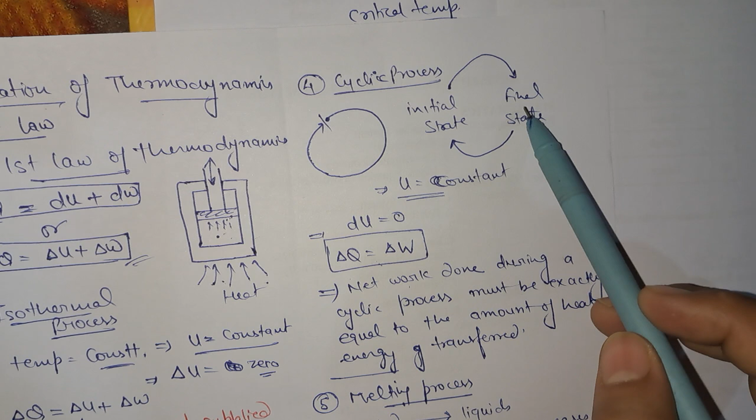Okay, so in our previous video, we have discussed about gases and vapor, and now we will discuss today about process which is cyclic process and non-cyclic process. So, what was cyclic process? Cyclic process is a system process which starts from an initial state and reaches to the final state, and the final state could be reached again to the initial state.

In this condition, the U remains constant, that is internal energy. So there is no change in internal energy, hence overall heat, whatever change in heat is done, that totally converted into work done. So there is only the change of heat energy into work done takes place.

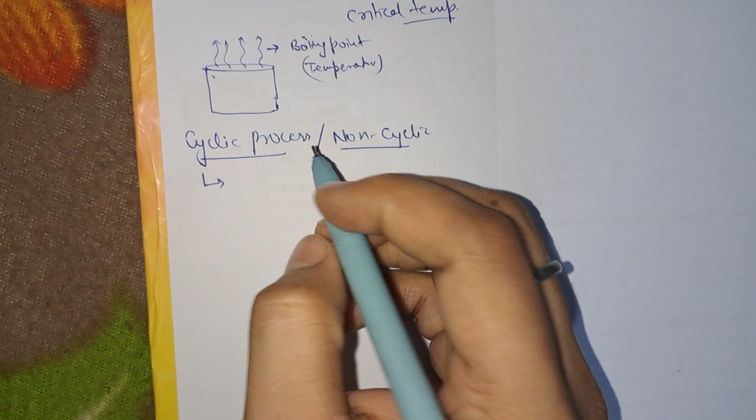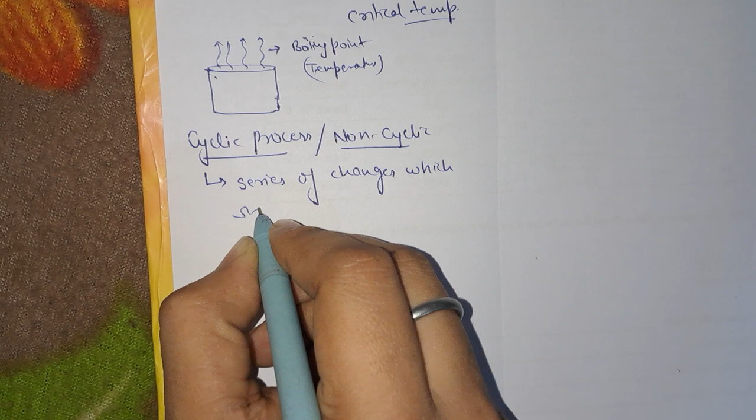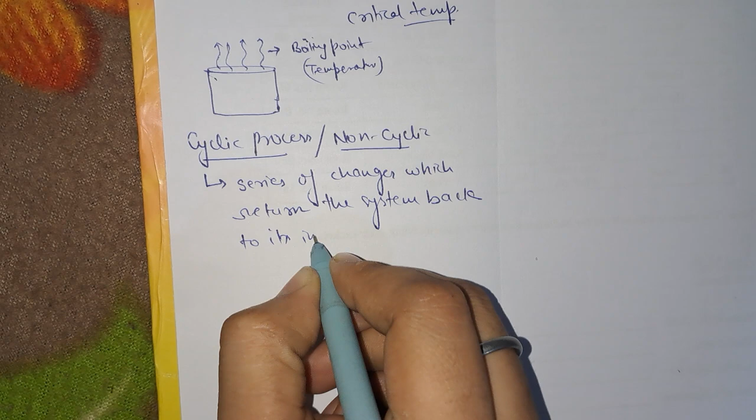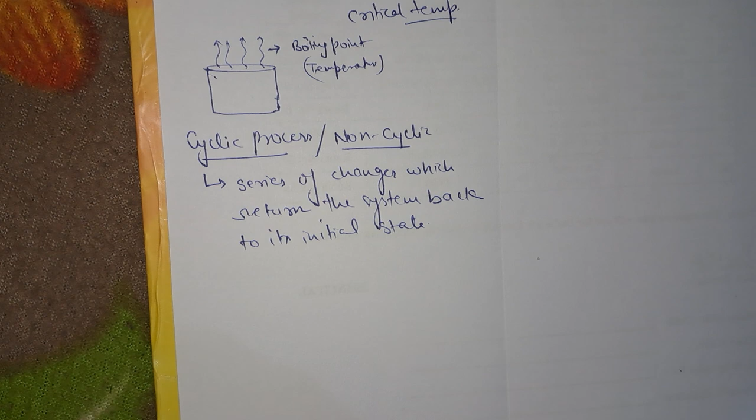So, cyclic process and non-cyclic process. So cyclic process is a process which contains a series of changes which return the system back to its initial state. Okay, it consists of various changes which return the system back to the initial state, as we have just told, whereas the non-cyclic process,

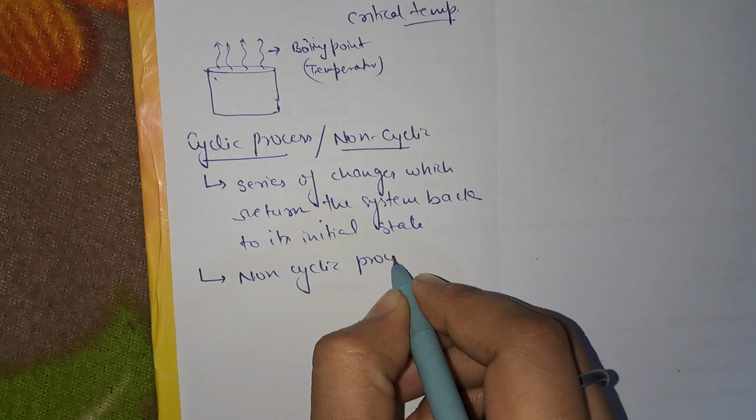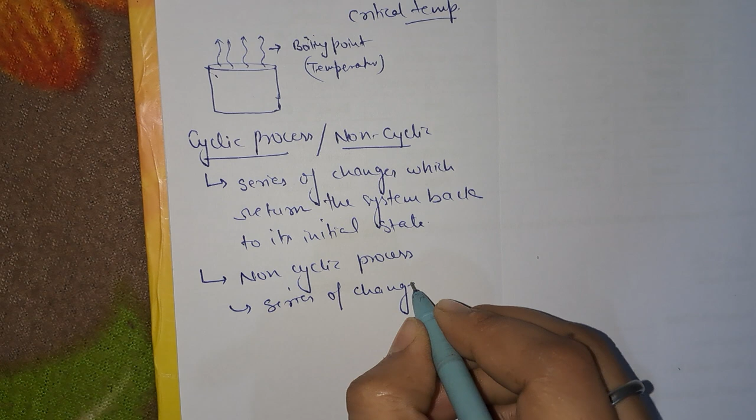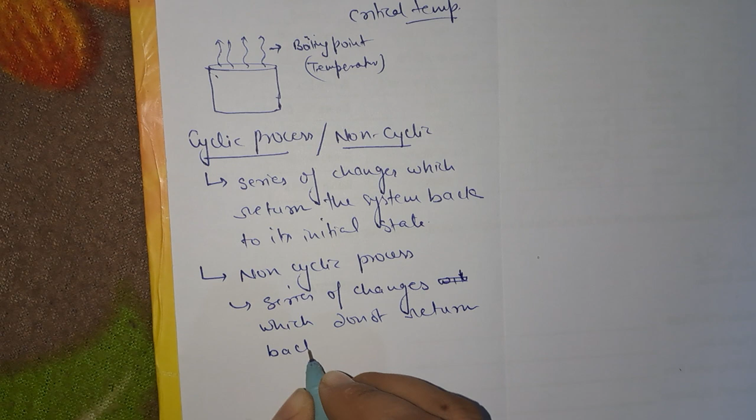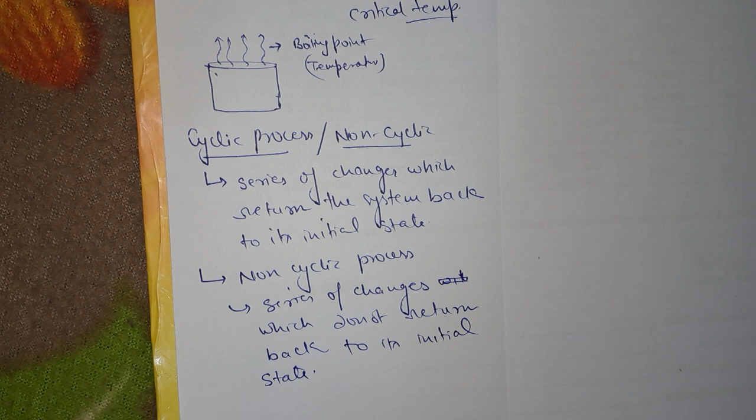what is a non-cyclic process? It is a series of changes which do not return back to its initial state. So this is all about basic cyclic and non-cyclic process.

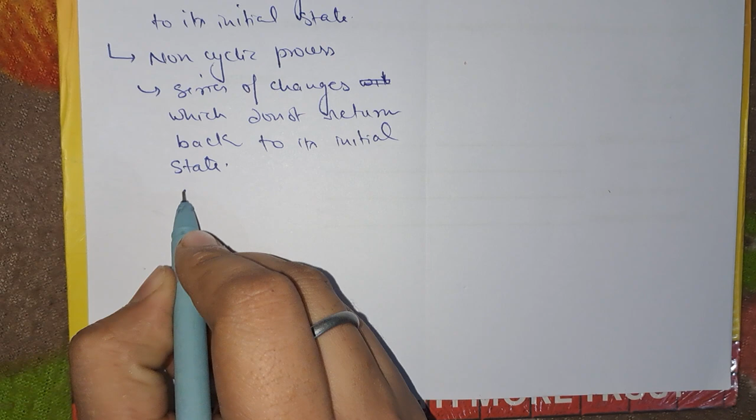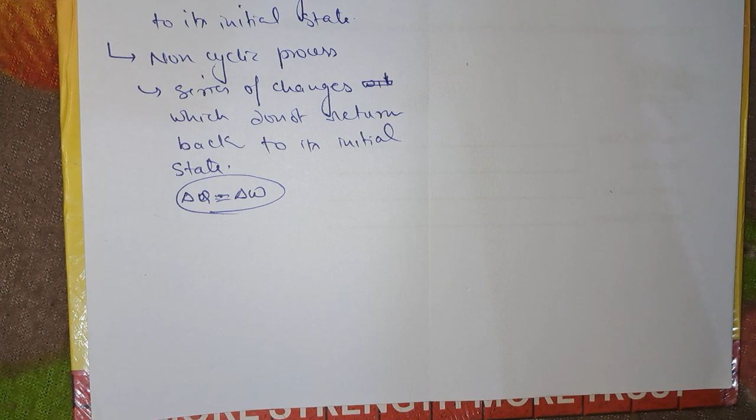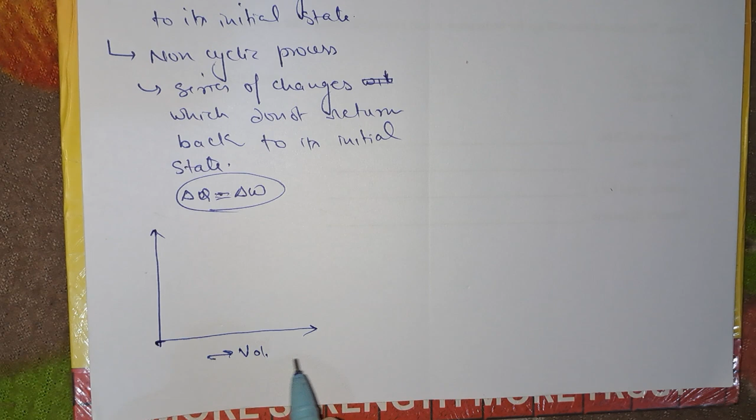What happens is, as we have discussed, that total heat energy is equals to change in work done. Whatever work done is by or on the system, that is nothing but the heat given. So let us talk about the work done in cyclic process. Let us consider this is volume and this is pressure.

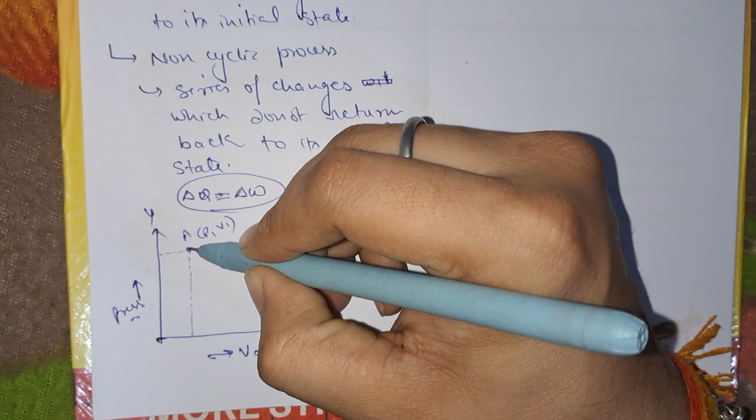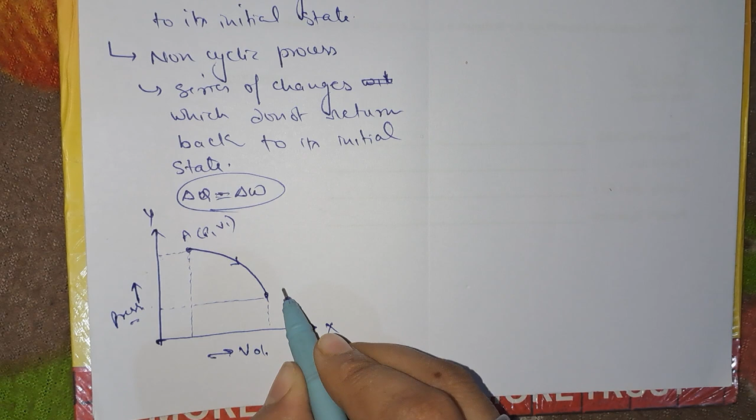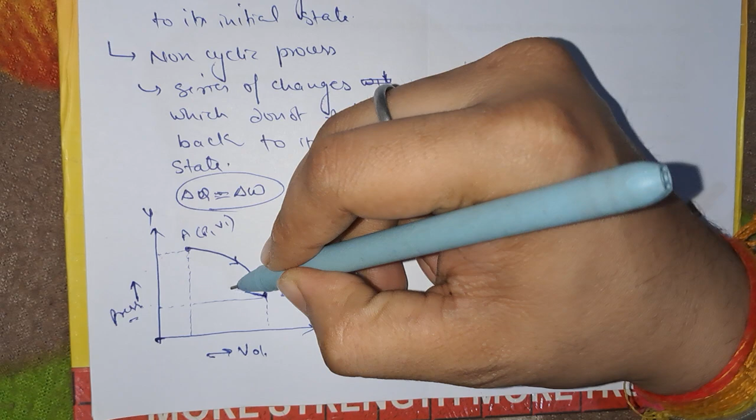So initially the system was at certain pressure and certain volume. Let pressure and volume at this point be P1 and V1, and some energy has been given, and through a process it has reached to a state, final state, let it be B, P2 and V2. So when whatever changes have been made are reversed, the system again reaches to the initial state, that is point A.

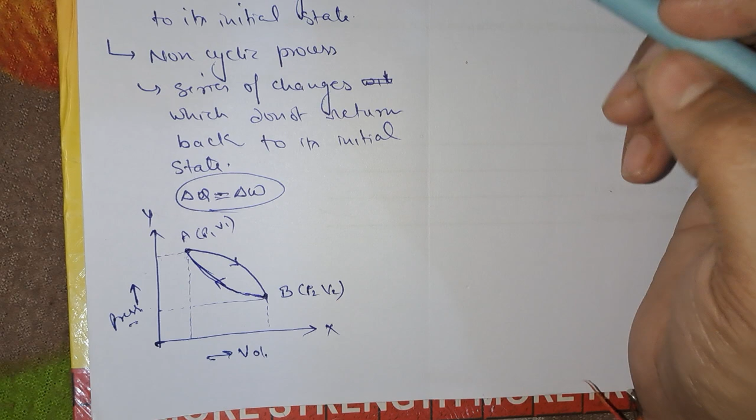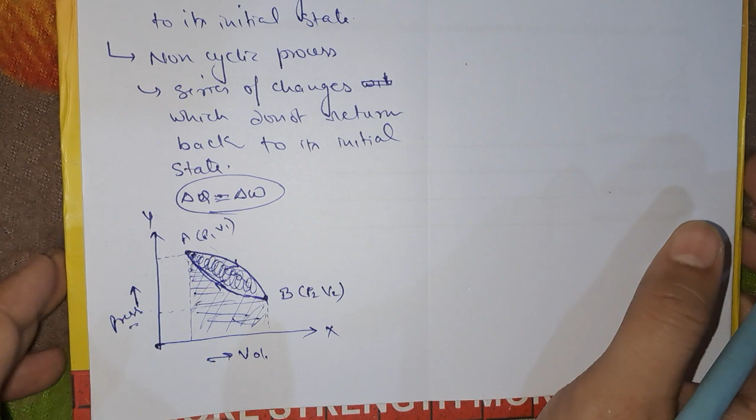So what is the work done? This complete area under this minus this. So the remaining is the work done during a cyclic process, given by the area under this curve. So let work done by forward process, let this A to B be the forward process.

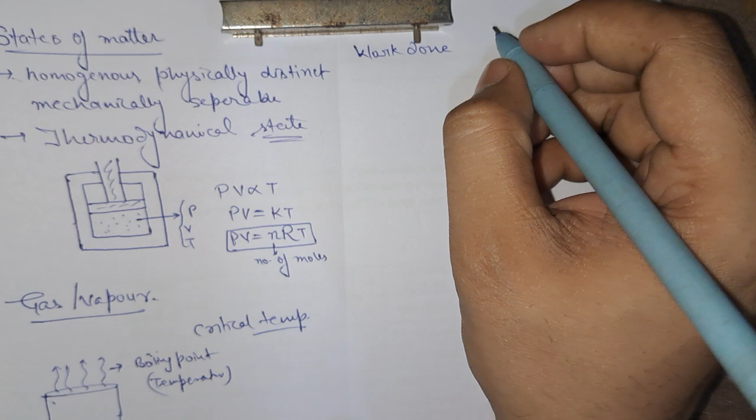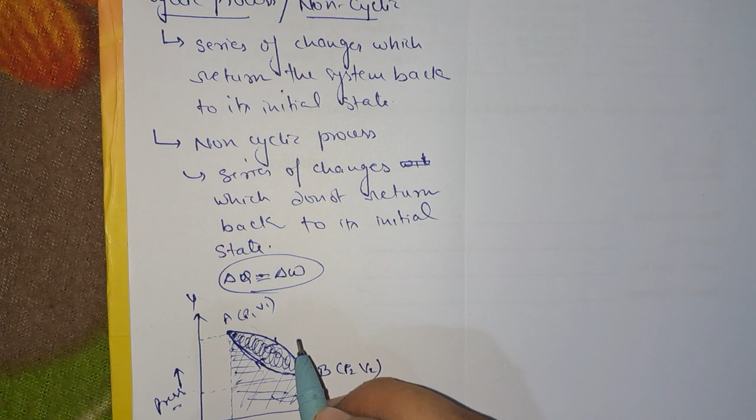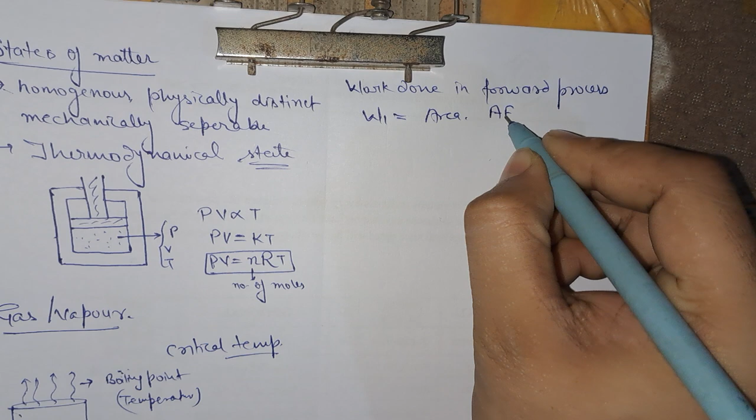So work done in forward process, let it be W1, is equals to area under A, let there be some more points also, let it be E, because A, B, C, D, E and F. So area under AEB, C, D, A.

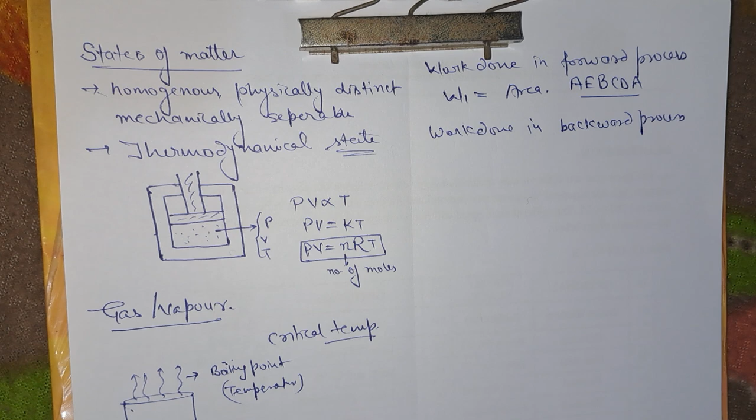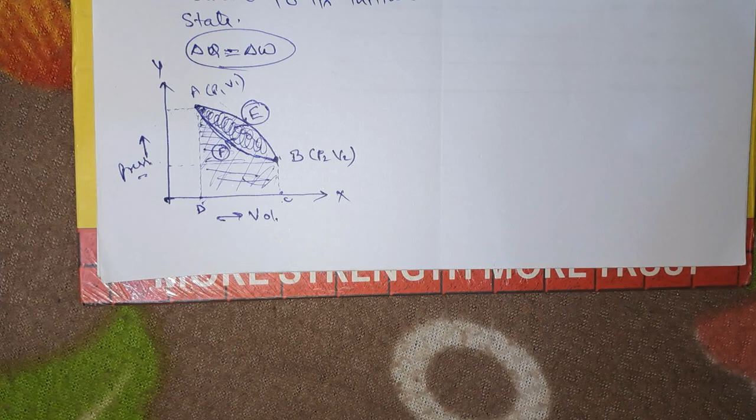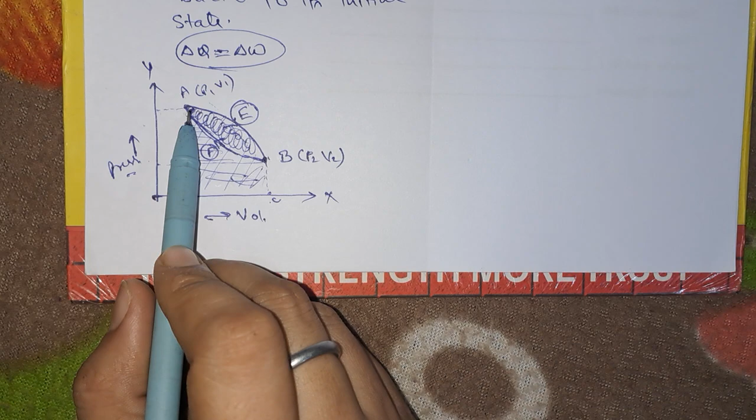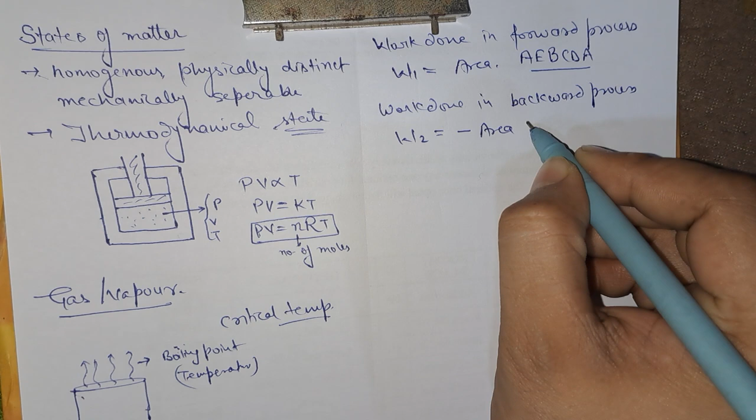And work done in backward process, that would be, and this is minus, since the process is in opposite direction, so we can put a minus sign here. So starting from this point, B, F, A, D, C, B. So W2 will be minus of area B, F, A, D, C, B.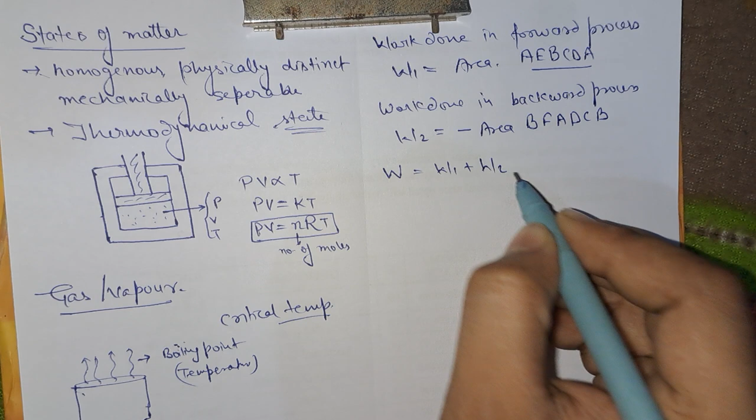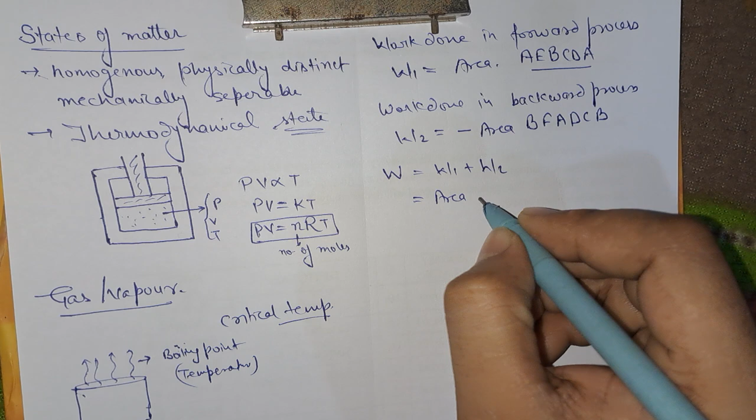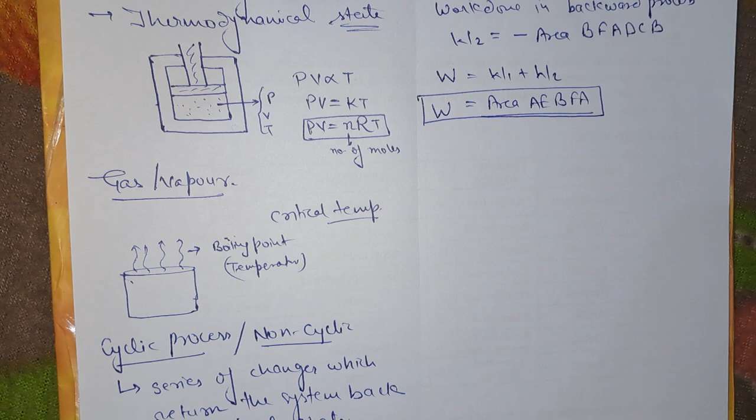So work done is equals to work done in forward process plus work done in backward process. So we get area of AEBCDA minus area BFADCB. So thus we get here AEBFA. So this is the total work done in the cyclic process. And in this case it is in anti-clockwise direction.

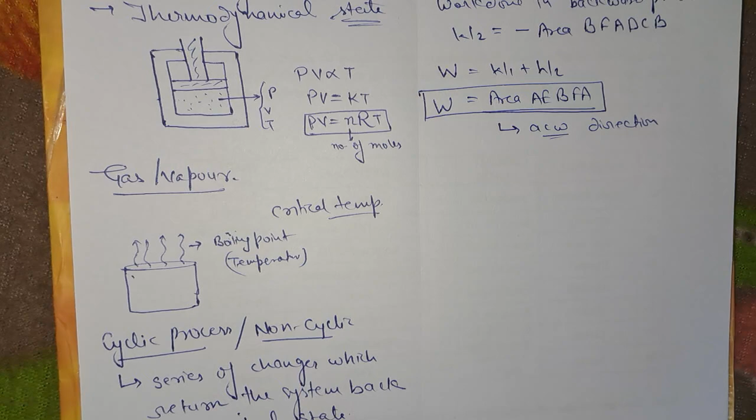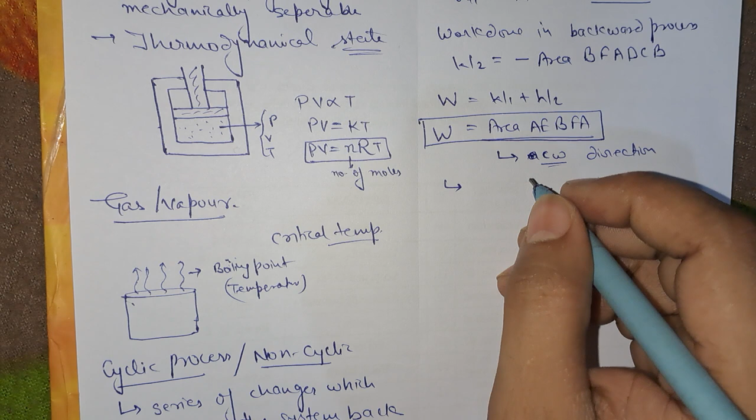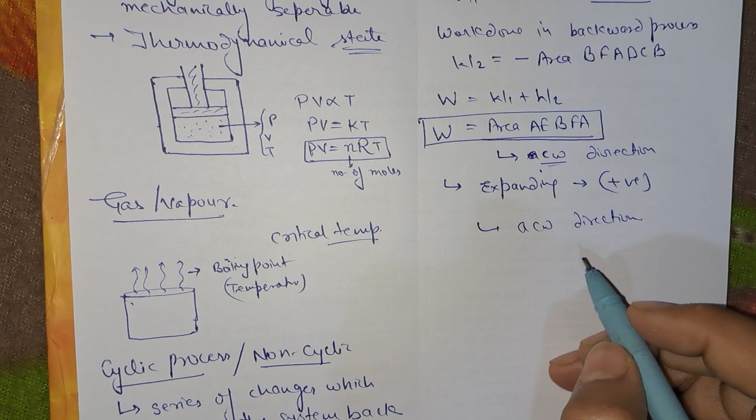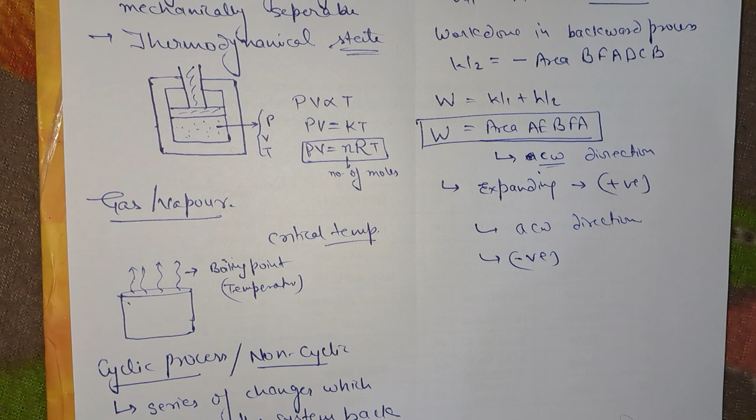So in this case it is forming a clockwise direction, it is not anti-clockwise basically. So in this, the clockwise direction is being observed, means the overall system is expanding, and in this it will be positive. And if it is observed to be anti-clockwise direction, then in this case the overall area comes to be negative. So in this case the work done is by the system, and in this case the work is done on the system. Okay.

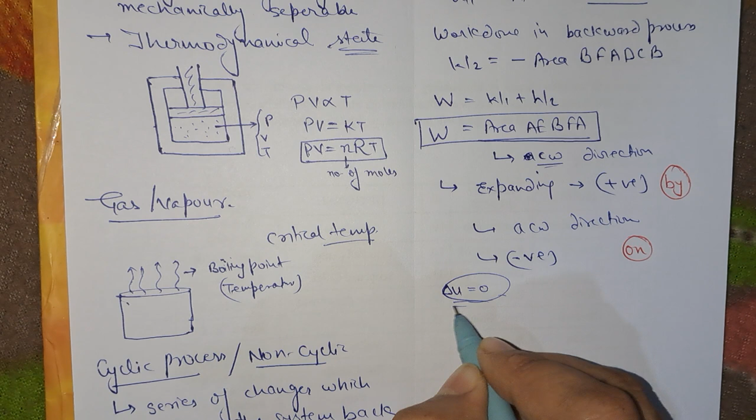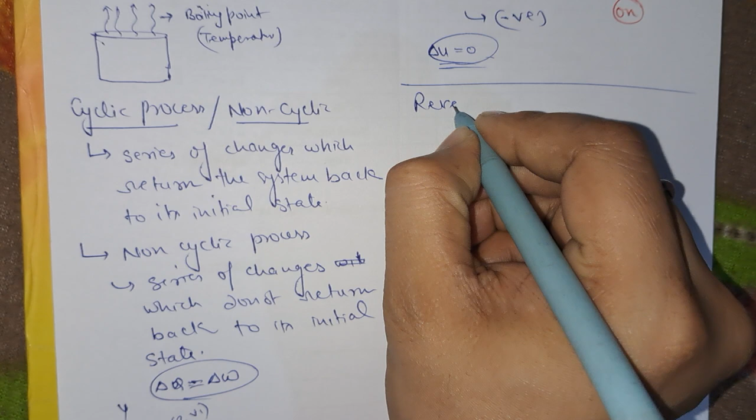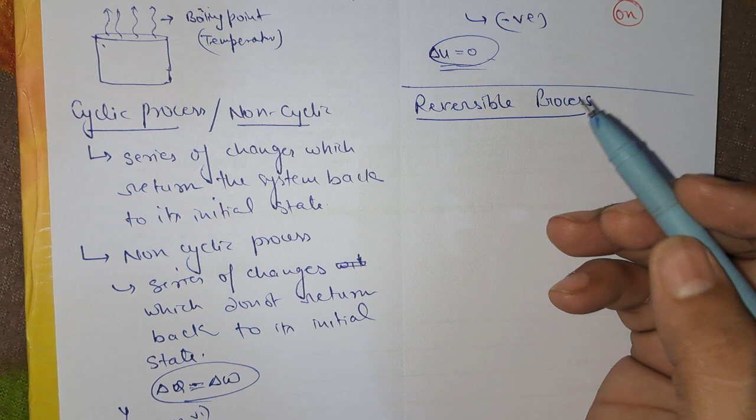So but we have to keep this in mind that in all the process overall internal energy remains same. Now let us talk about reversible and irreversible process. So reversible process: simple by the meaning itself, it tells you that if the process and the steps are being reversed at all points, then in this case, the process is said to be reversible.

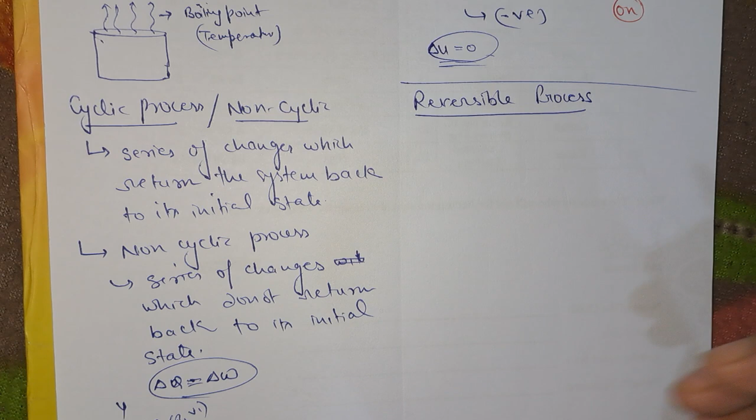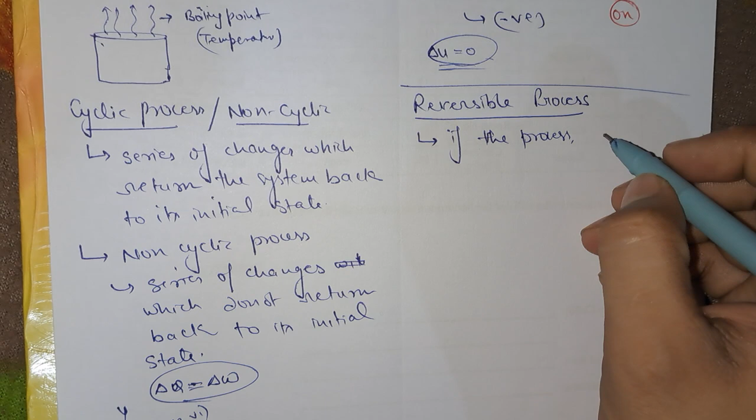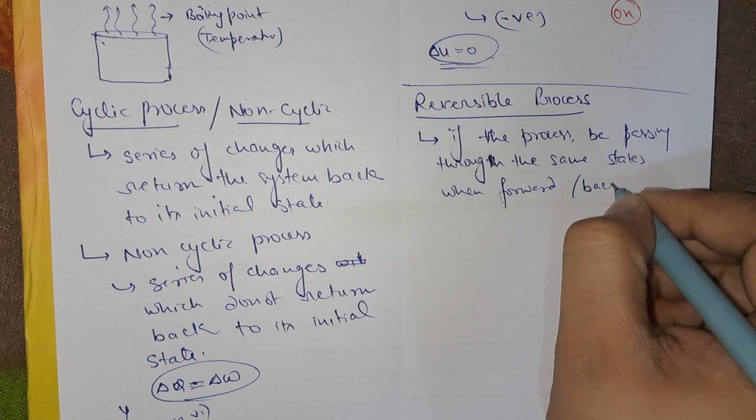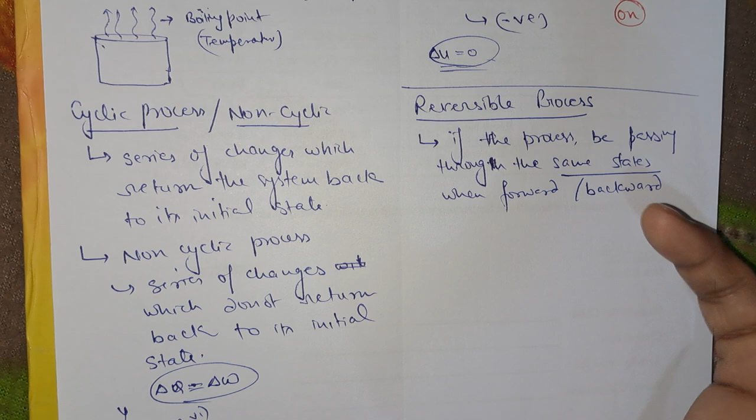Means if the process is passing through the same states when forward or backward. So when the process is forwarded or backwarded, it is passing through the same states. The intermediate states are same. Then in such case, it is a reversible process.

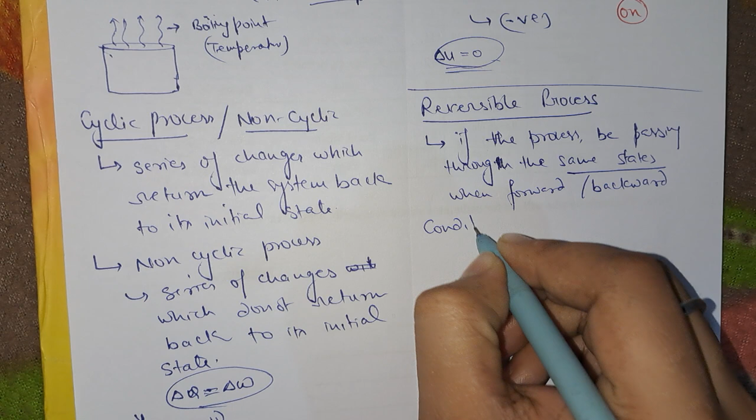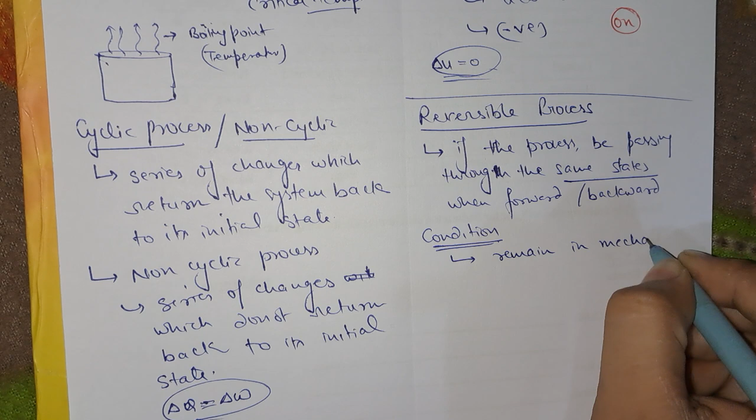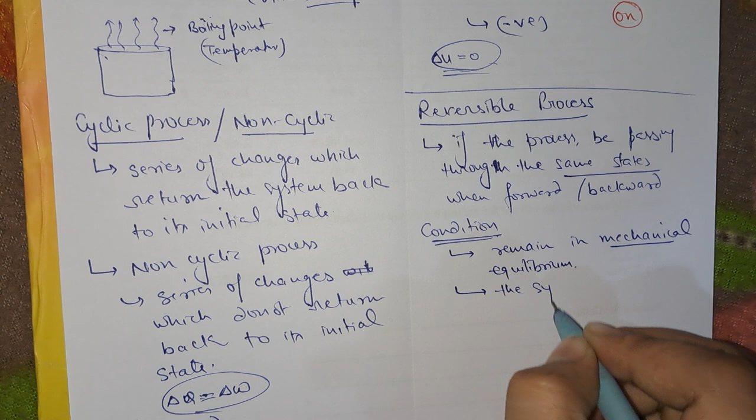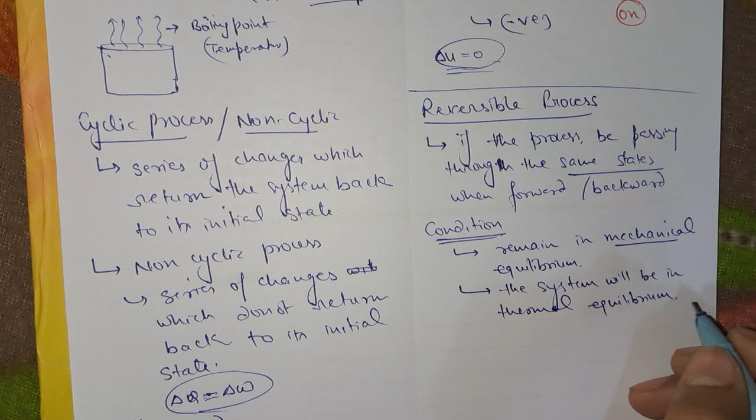So let us talk about the conditions of reversible process. First is it will remain in mechanical equilibrium. Second, since it is a reversible process, in this process all the things mostly will be in equilibrium. So in this case the system will be in thermal equilibrium, also in chemical equilibrium.

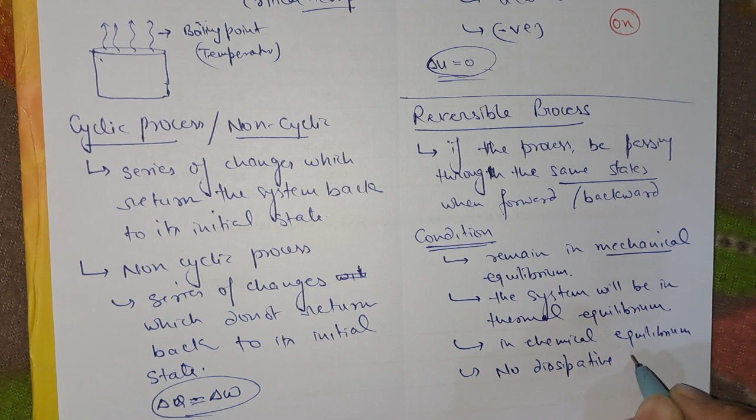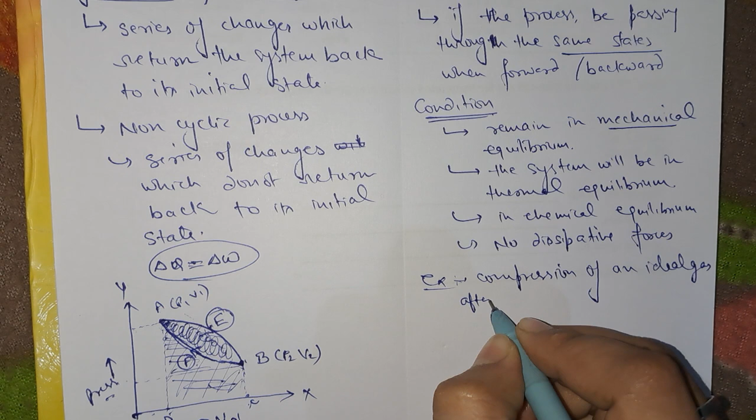So at all cases the equilibrium is achieved and there are no dissipative forces, which are the reasons for losses, such as friction, viscosity, resistance, and so on. So what are the examples? Examples can be taken as the compression of an ideal gas. So compression of an ideal gas after slow expansion.

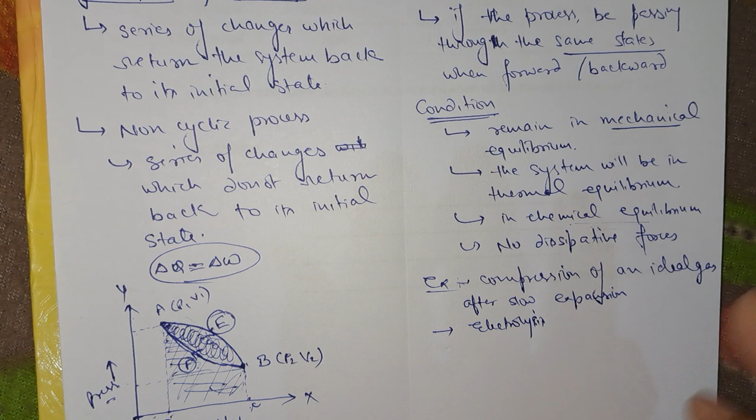So this could be treated as a reversible process. Also, since it is also considered to be in chemical equilibrium, then electrolysis under balanced condition will also be taken as reversible process. So the given examples could be treated as reversible processes since the states through which the forward process has been taking place, the same steps we have also observed when the process is reversed, means during the backward process also.

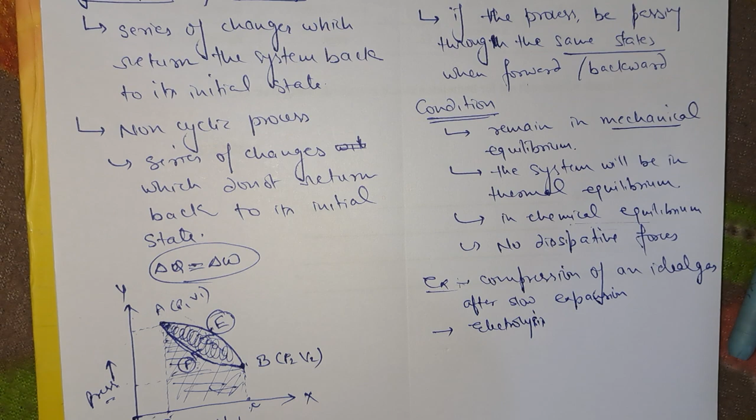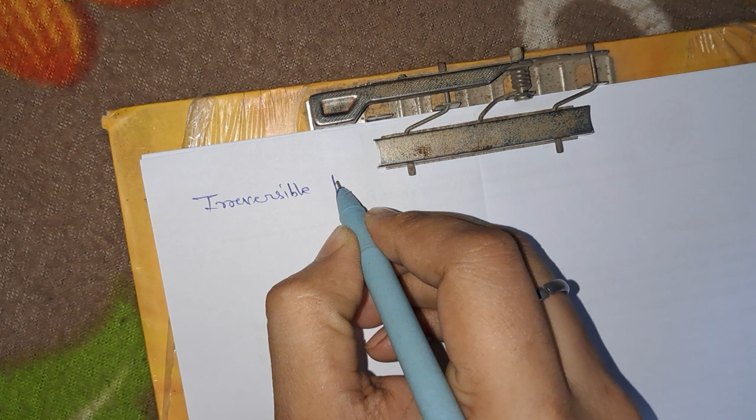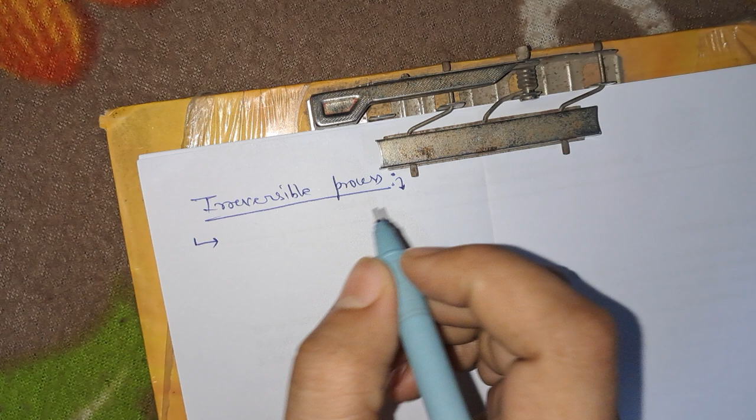Okay, now we will talk about irreversible process. So what is irreversible process? So let us talk about irreversible process. So it is very simple, if any process does not get its intermediate states to be repeated. So if any process does not get its intermediate states to be repeated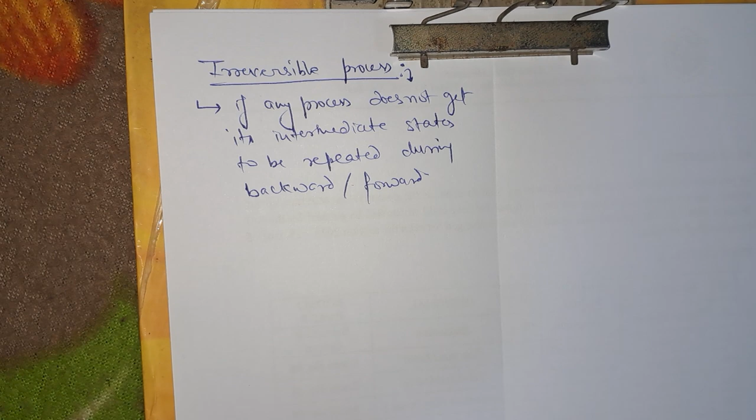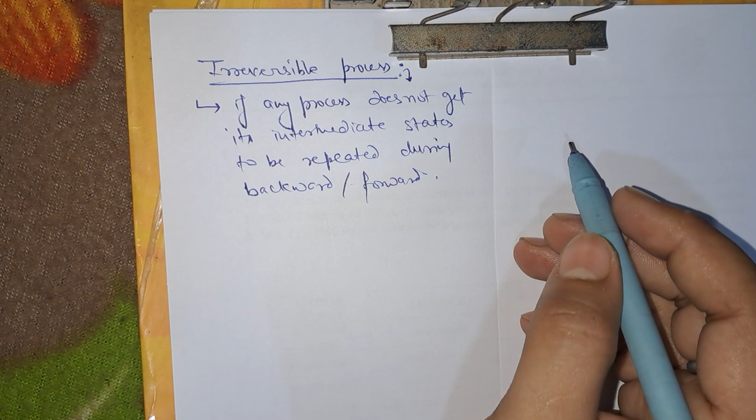during backward slash forward. Means in both the cases, if it is not observed that the states are being achieved, so in this case the process would be known as irreversible process. So the condition is no, since there are no such required conditions.

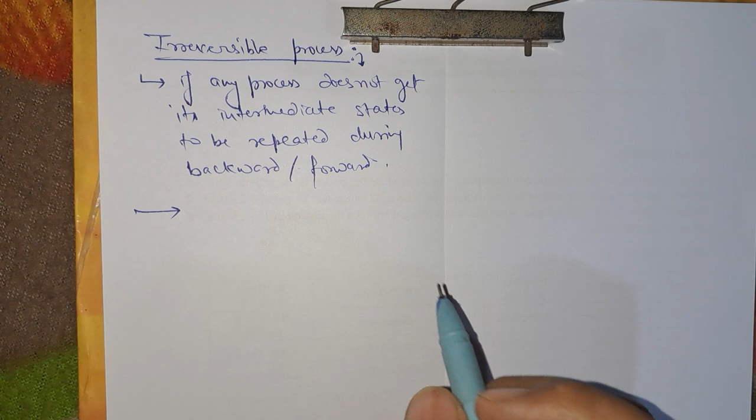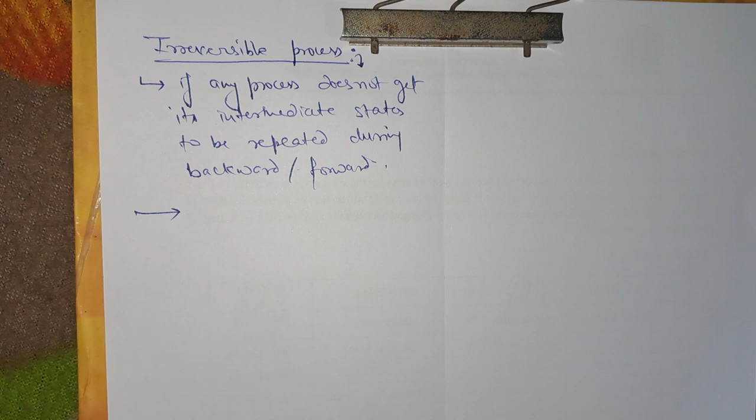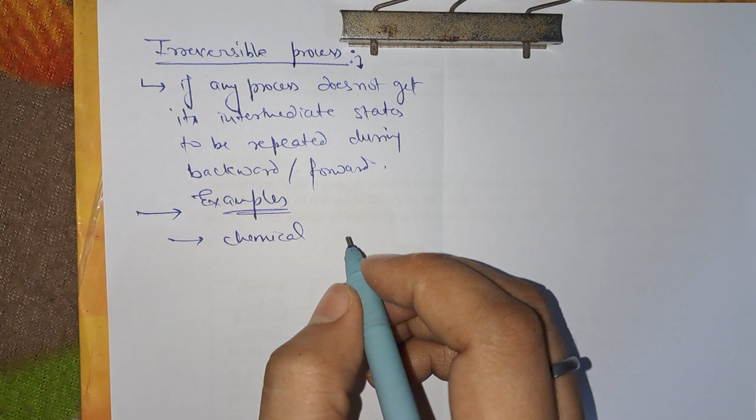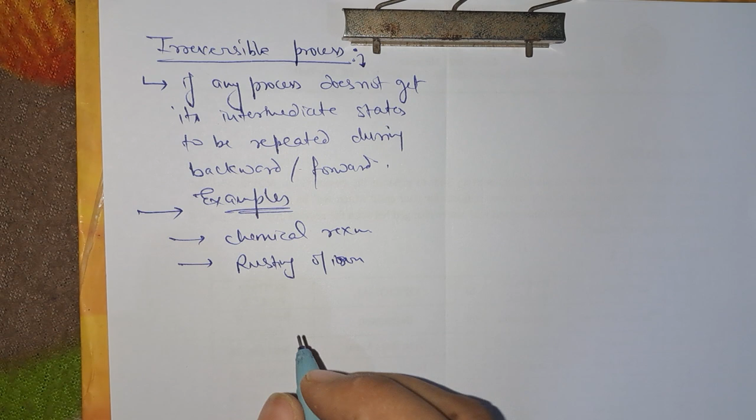So what would be the example? Basically most of the chemical reactions are irreversible. So in that case, thermal equilibrium is not achieved, hence chemical equilibrium also not achieved. Hence we can consider it as an irreversible process. So examples, chemical reactions which are irreversible in nature, and rusting of iron. Means these are some examples, chemical examples. And adiabatic process.

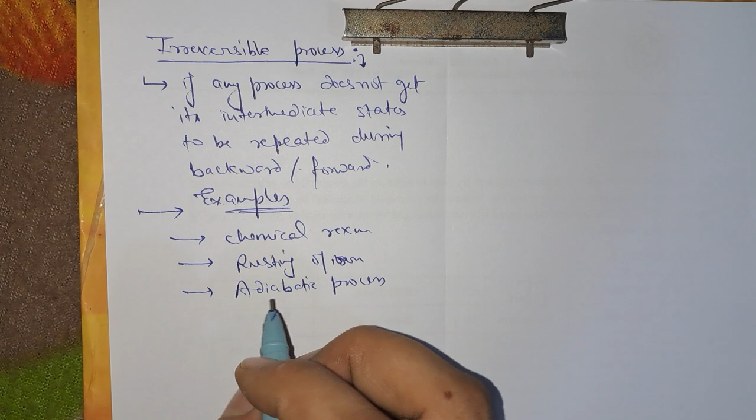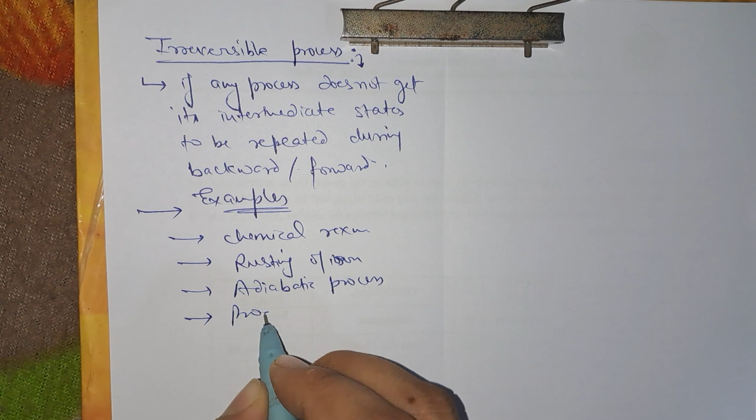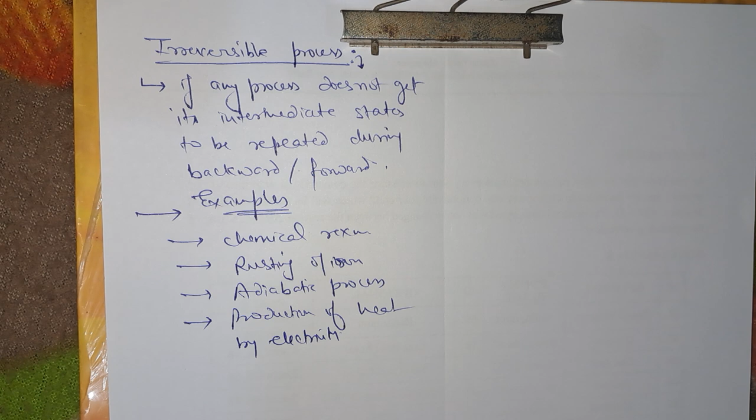And also we can consider, let us say, production of heat by electricity. When the electricity is being passed through the wire, it creates a heating effect, and due to which the electrons get disturbed, and this disturbance cannot be repeated. Means the electrons' state could not be regained. So this could be considered as an irreversible process.

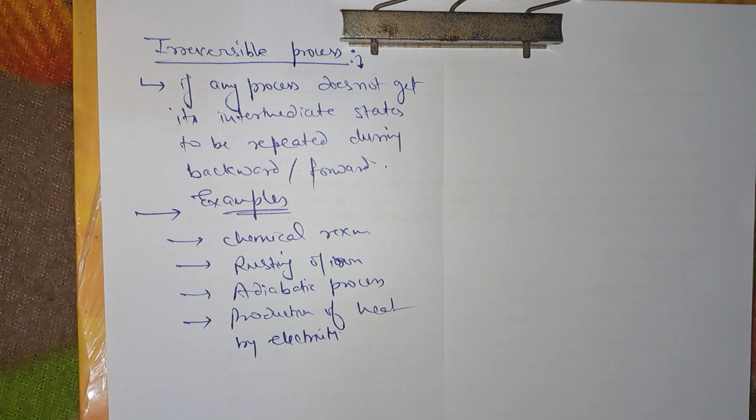So here your thermodynamics part is completed. We will now next move to the next chapter, that is kinetic theory.